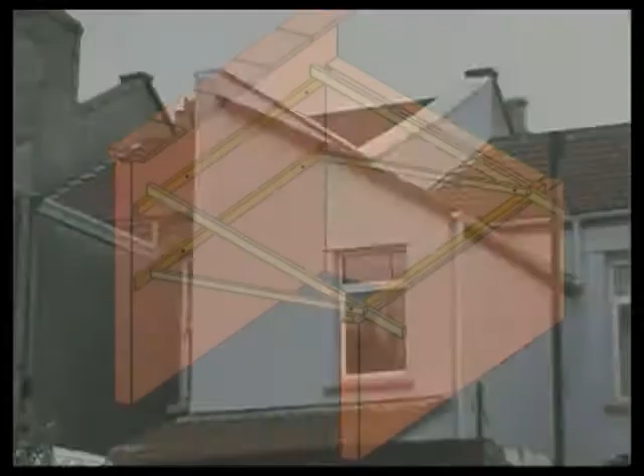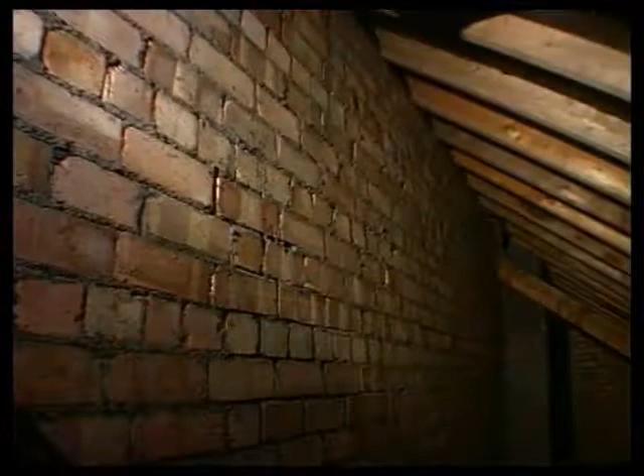It has a limited span and is most likely to be found forming rear extensions. Thousands of these were built at the end of the 19th century. The roof is built with sloping timbers known as rafters. They can be supported on wall plates, and it was usual practice to provide joists to form a ceiling. In some cases, the top of the timbers were built into the wall, but this gave little protection to the rafter ends, and damp penetration could lead to problems of rot.

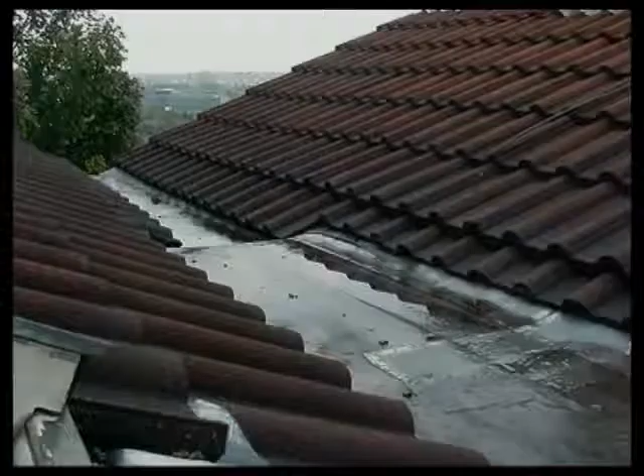Some Victorian houses were built with double lean-to roofs, with a centre valley for drainage. These can cause some maintenance headaches. Simple lean-to roofs are only capable of limited spans, say 3 metres. Greater spans can be achieved by inclining pairs of rafters. This arrangement is known as a couple roof.

The feet of the rafters are normally supported by timber wall plates. At the top, they're nailed to a ridge board, which prevents lateral movement and makes the roof easier to build. The rafters are traditionally fixed at 16-inch or 400mm centres. This is probably the most cost-effective arrangement of the timbers.

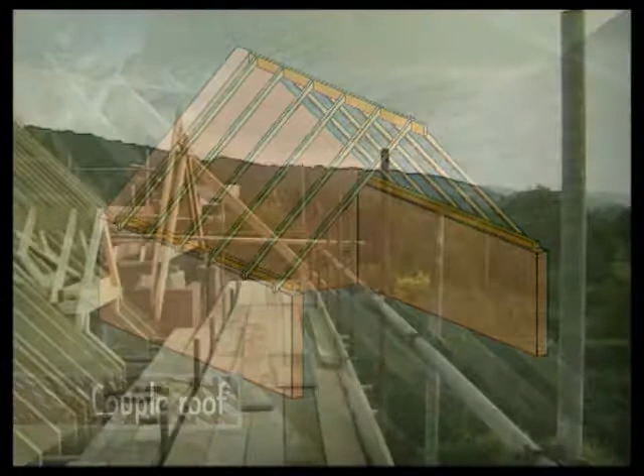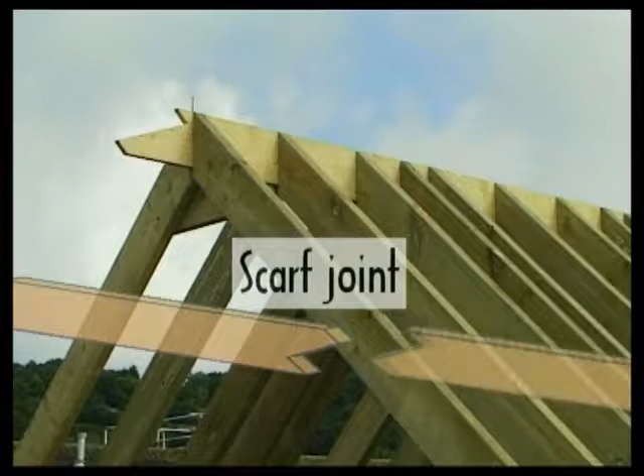Traditional or cut roofs are still built today, but they're expensive compared to their modern counterparts. They can require sophisticated carpentry joints. A scarf joint, for example, is traditionally used to lengthen timbers. The foot of the rafter should be notched over the wall plate and nailed to provide a good fixing. Notching also helps align the top of the rafters.

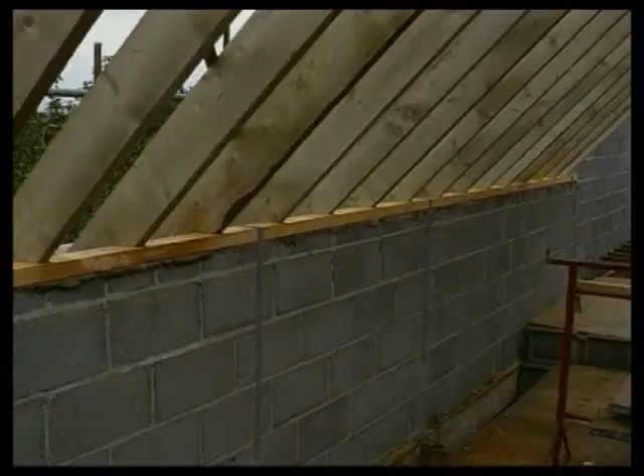The plate is usually bedded in mortar and strapped down to the wall. Strapping is not always required for traditional roofs, but is good practice and doesn't cost much. At the eaves, the exposed feet of the rafters are usually hidden and protected by a fascia board. Any gap below can be finished with a soffit board.

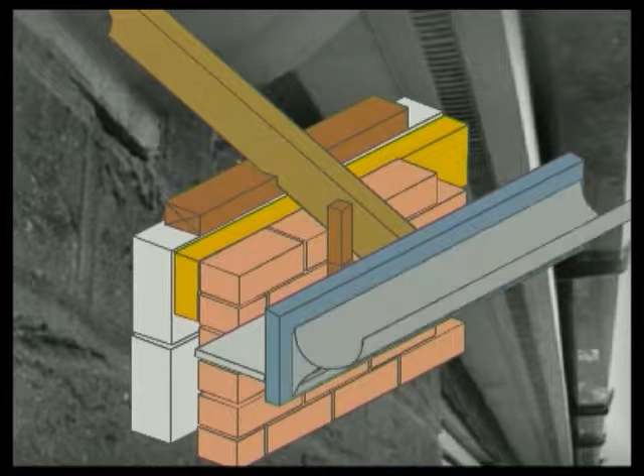The soffit is commonly supported by a simple timber framework, and the fascia, which supports the guttering, is nailed to the rafter ends. Vents for the roof space often form part of the soffit. Overhanging eaves help protect the wall below. The detailing can be attractive, but is expensive. However, in the long term, it helps prevent prolonged saturation, the cause of most brick defects.

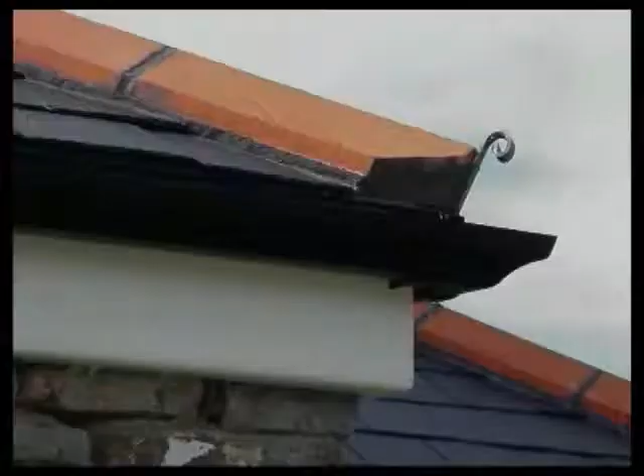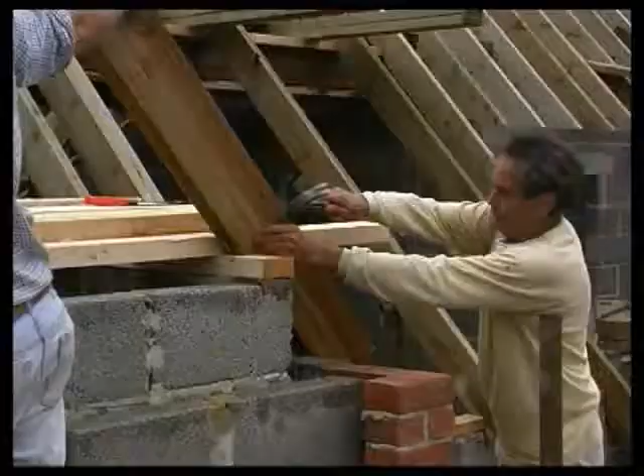Flush eaves, where there's no soffit and the fascia is fixed tight against the wall, are cheaper but provide little weather protection. Traditional cut roofs are very versatile and can be adapted to suit almost any house design. They tend to be used nowadays for one-off prestigious developments, so you rarely see them on new, large housing estates. On this site, safety gear is not being worn, despite being good practice and in most cases a legal requirement.

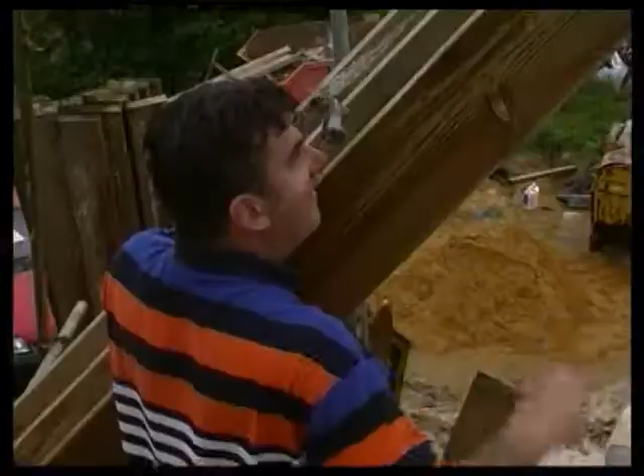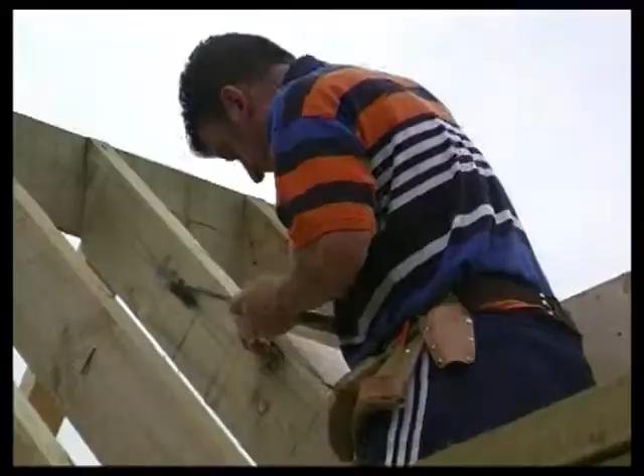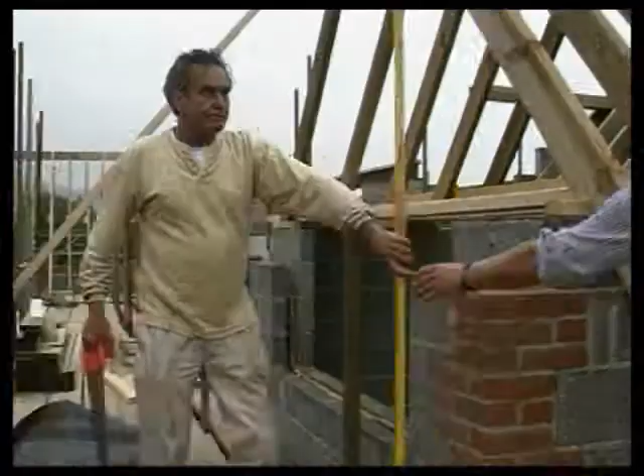Any new roof needs to comply with building regulations. These contain, among other things, approved guidance on the size of roofing components for given spans and loadings. A roof could also comply with the regs in other ways, for example, if it was designed by structural calculations. Most timber is imported from Canada or Scandinavia. Homegrown timber grows too quickly in our warmer climate, producing a lower density material. Timber durability can also be enhanced by chemical treatment against rot and insect attack.

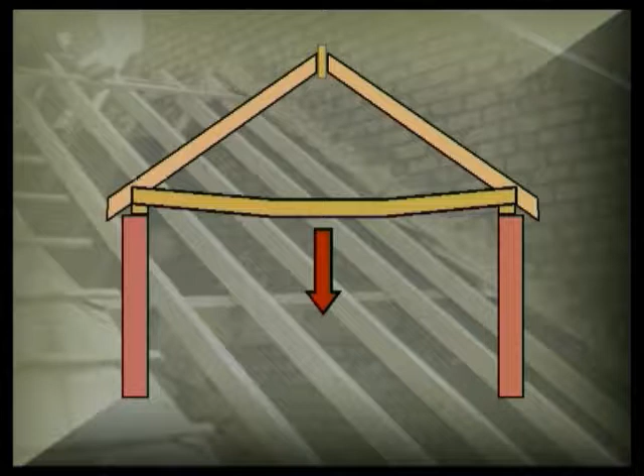A problem with simple couple roofs is that they tend to spread when loaded. A closed couple roof prevents this by tying the rafter feet with a ceiling joist. Closed couple roofs are suitable for small houses with spans of up to about 4 metres. At greater spans, the ceiling joists tend to sag. They can be supported by an internal load-bearing wall or by a combination of binders and hangers suspended from the ridge.

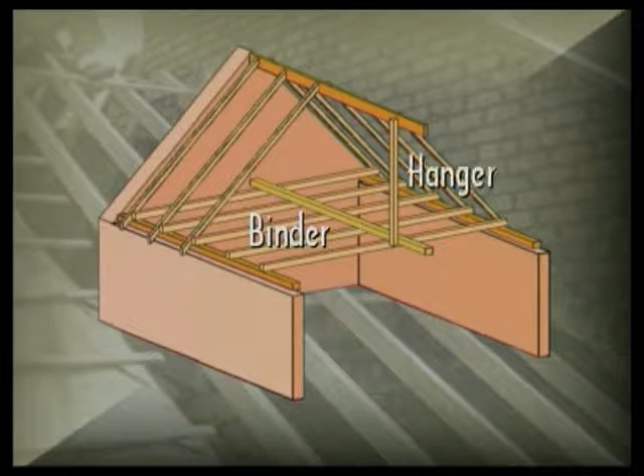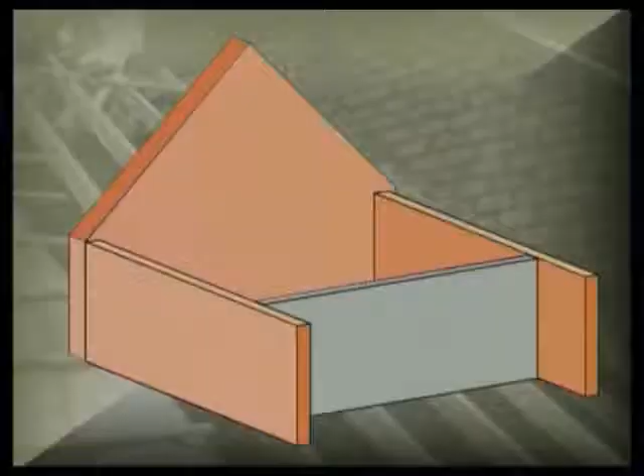Simple closed couple roofs are not suitable for most houses. Even modest Victorian terraces will need roofs that can span well over 4 metres. Large spans require long rafters, and to prevent them deflecting, they would need to be of substantial depth. This is a heavy and expensive solution. A more cost-effective approach is to use purlins. The purlin is normally built into the gable or party walls and supports the rafters mid-span. There's usually one on each side of the roof.

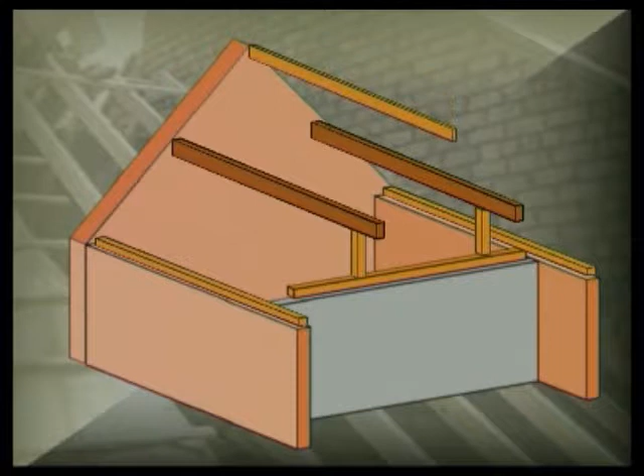Where houses are fairly narrow, purlins can span from wall to wall. In wider houses, deeper purlins or some form of intermediate support will be required. One common method is to use diagonally opposed struts supported on an internal load-bearing wall. Although effective, these struts clutter up the roof space. Another option is to strut vertically. This requires a suitably positioned internal load-bearing wall. To distribute the load along the wall, it's good practice to provide a wall plate.

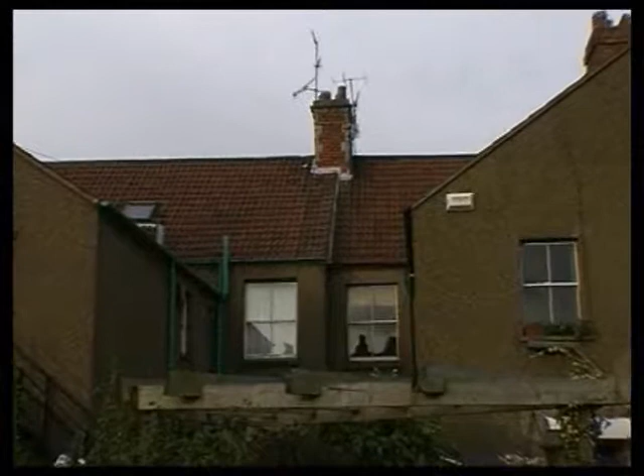The vast majority of houses built before the 1950s will have some form of purlin roof. Many will also have purlin strutting. In summary, let's look at a well-built traditional cut roof from the early 1900s. The rafters are supported mid-span by substantial purlins spanning about 6 metres between party walls.

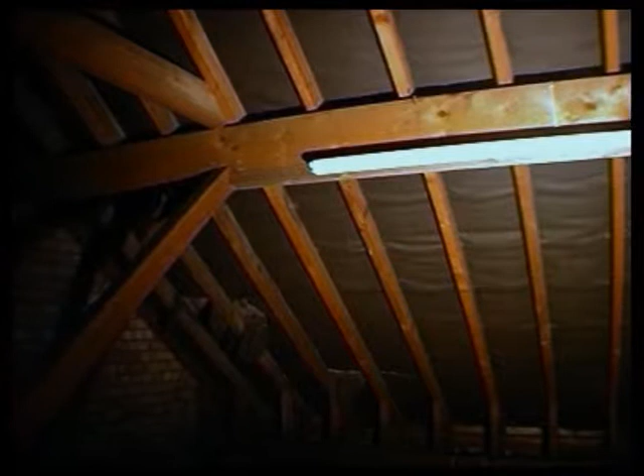The purlin ends are supported on a brick corbel and partly built into the wall. Two pairs of diagonal struts support the purlin. These bear onto an internal load-bearing wall. A neat bird's mouth joint ensures a strong and stable connection between the strut and purlin.

Additional struts run from the purlin to the party wall. Two large section horizontal ties provide rigidity in high winds. At the top of the roof there is a ridgeboard supported on corbels.

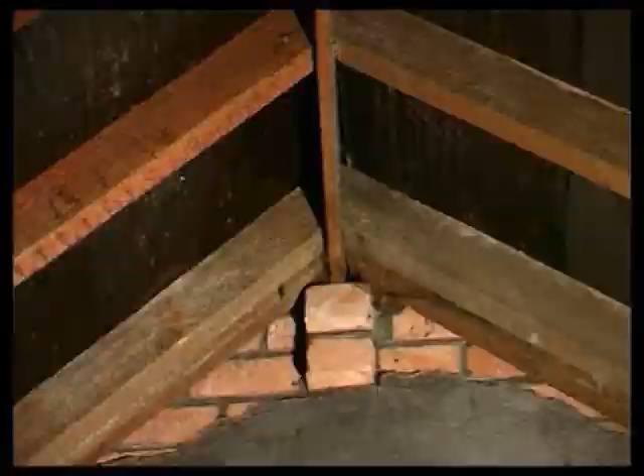Purlin roofs are still built today, but are not very common. On this site, the roof space is being used for accommodation, and the designer has incorporated steel purlins. A wall plate screwed to the top of the purlin provides a fixing for the notched rafter. Steel's high strength allows long spans and precludes the need for purlin strutting.

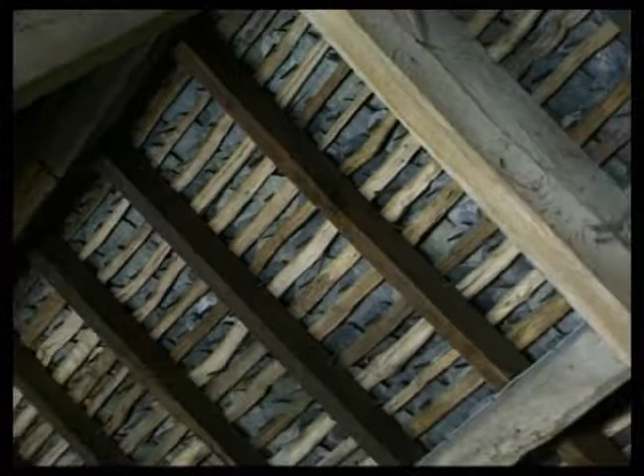In big old houses, internal walls were usually too far apart to provide intermediate support for the purlins. In other buildings, there were no internal walls at all. In these situations, trusses provided purlin support.

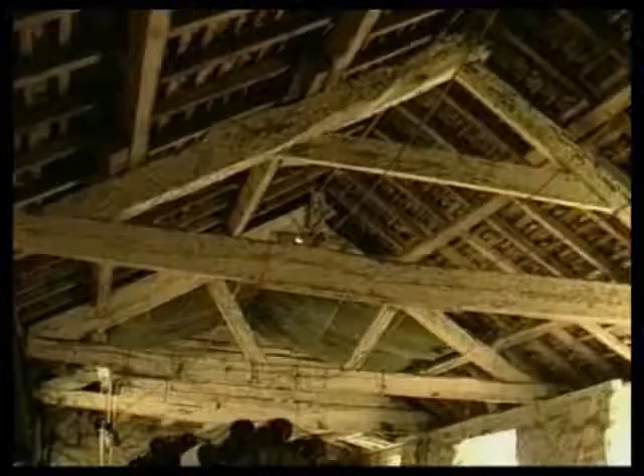Trusses can be found in a range of shapes and sizes. Their primary function is to support the purlin, but they also help tie the external walls where there are no ceiling joists. They were made from big, heavy timbers, often with bolted and strapped connections. One of the best places to see traditional roof trusses is in Britain's parish churches.

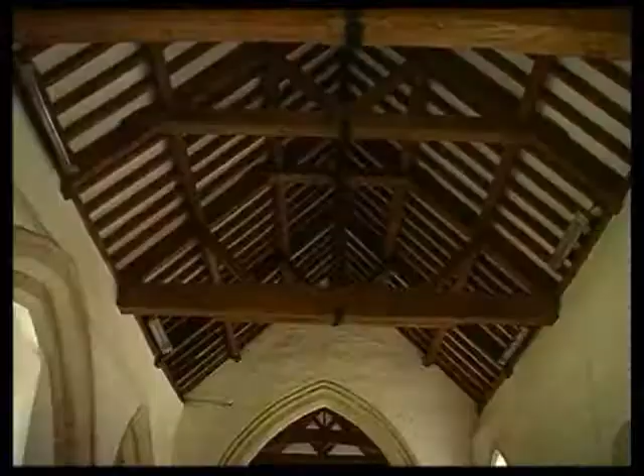At various times in Georgian and Victorian Britain, houses were built with parapet walls. Sometimes this was to emphasise the facade and reduce the visual impact of the roof. The construction is not as complicated as it looks. Typically, the rafters are birds-mouthed onto a wall plate. The ceiling ties provide support for the gutter, which was traditionally lined with lead. For durability and appearance, the parapet is finished with a coping.

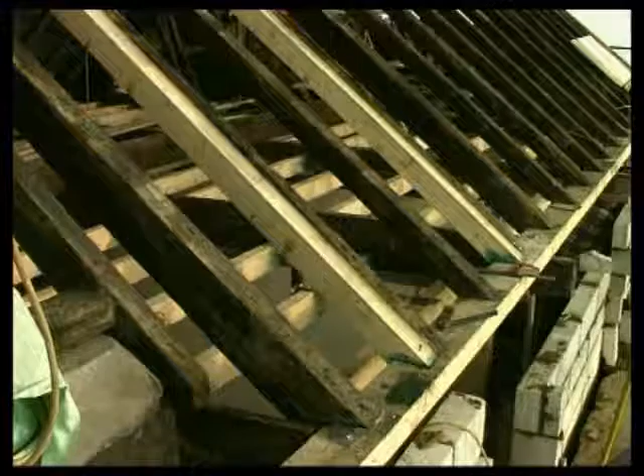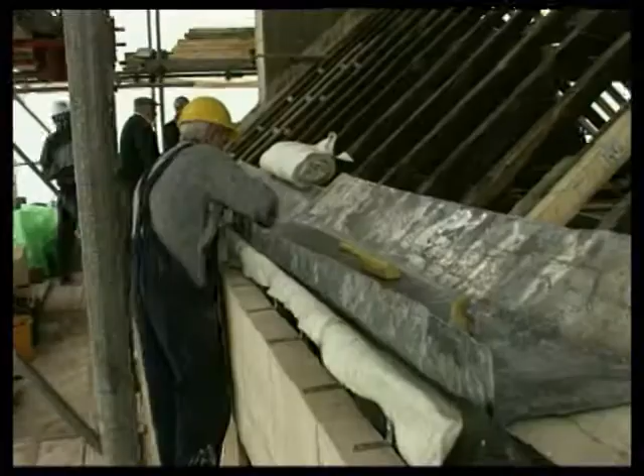This Georgian roof is being renewed using traditional techniques. Softwood boarding is being laid to take the lead gutter. Lead working is a very skilled and arduous job, but done properly, lead can easily last 150 years.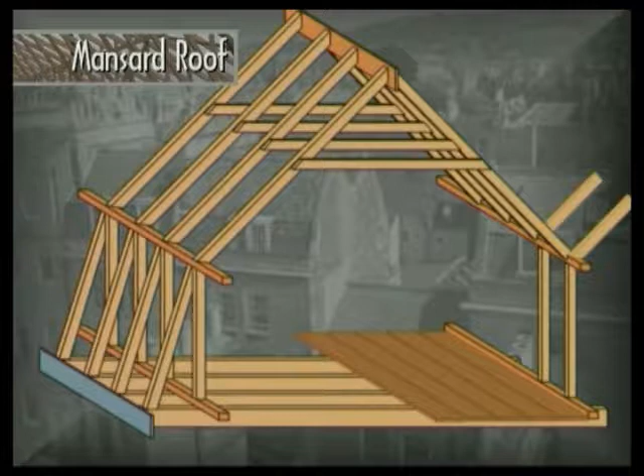Mansard roofs are easy to spot because each roof face has two slopes. Two mansards side by side keep the overall height of the roof to a minimum. Their purpose is usually to provide accommodation within the roof space. They were very popular in the 18th and early 19th centuries, and there are some examples from the 20th century.

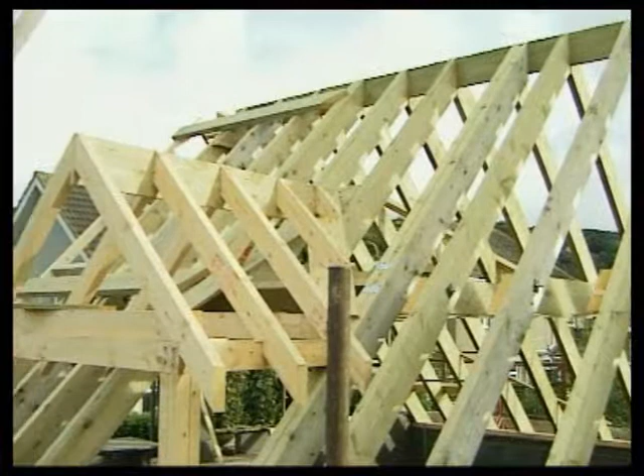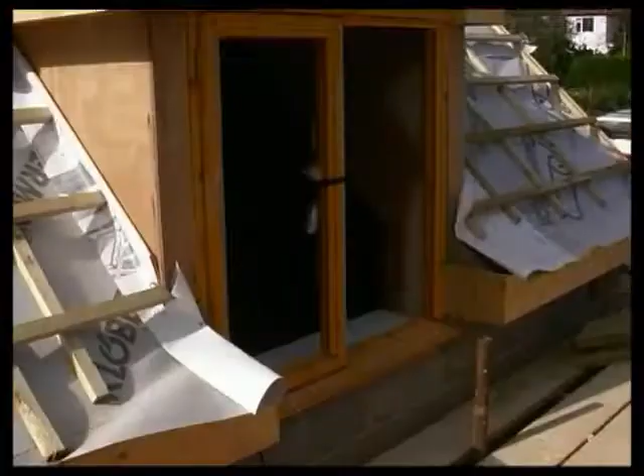Collar roofs were sometimes used to create an upper floor at minimum cost. It's similar in construction to a closed couple roof, but the tie or collar is part way up the slope. The higher the tie, the less effective it is at providing restraint. A good joint between the tie and the rafter is therefore essential. A dormer set just below the collar provides additional space, allows for vertical window openings, and can also be an architectural feature.

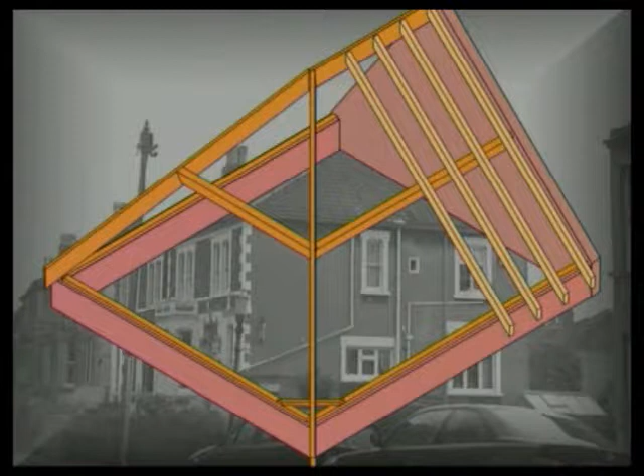Some roofs are hipped. The hip precludes the need for gable brickwork, but its construction is quite complex. The hipped end is constructed from a pair of hipped rafters which run to the corners of the wall. The cut rafters which run into the hip are known as jack rafters. The need for purlins and struts depends on the size of the roof.

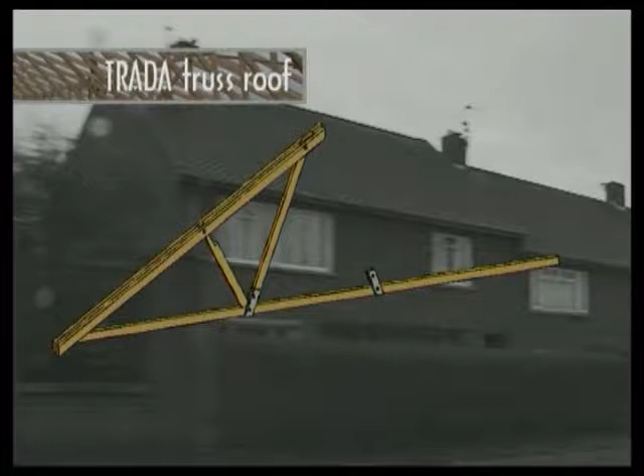In the aftermath of World War II, traditional building materials were in short supply, and government restrictions limited the amount of timber which could be used in housing. The TRADA truss is a lightweight prefabricated version of the traditional truss. It was designed to reduce the amount of timber in the roof while still allowing big spans.

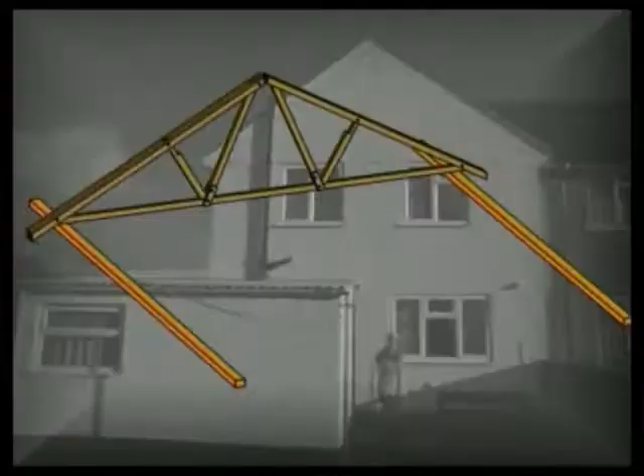The trusses support the purlins and were typically fixed at 1.8 metre centres, with common rafters and ceiling joists in between. No internal load-bearing walls were required. The popularity of TRADA trusses was relatively short-lived. Their success led to more prefabrication of roofing components and the eventual development in the 1960s of trussed rafters.

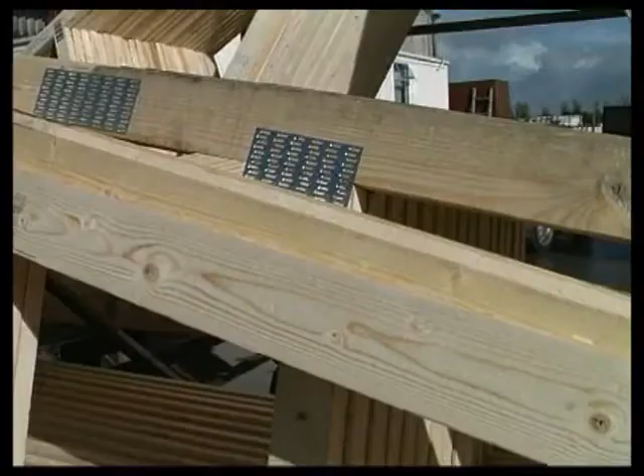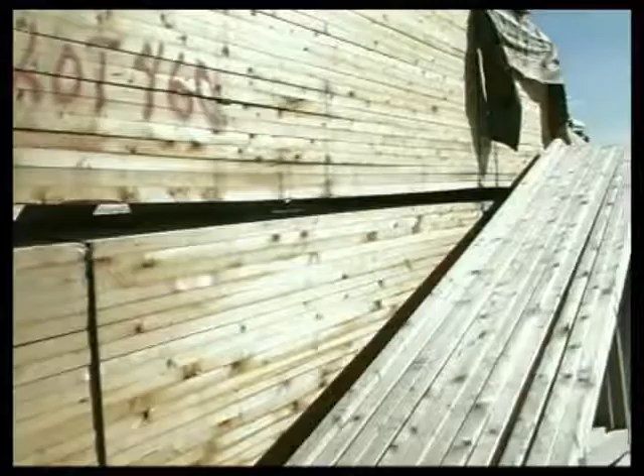Trussed rafters provide a lightweight and fast form of roof construction. They come in many shapes and sizes to suit almost any building. The design of a trussed rafter depends on a number of factors: span, shape and pitch of the roof, the position of load-bearing walls, the height, location and exposure of the building, the type and weight of roof coverings, and the overhang at the eaves.

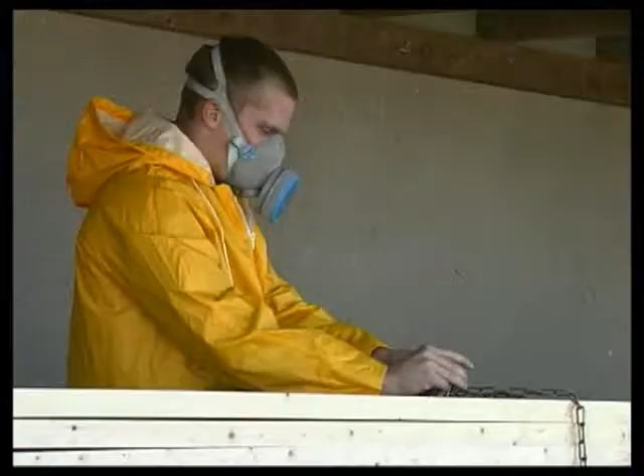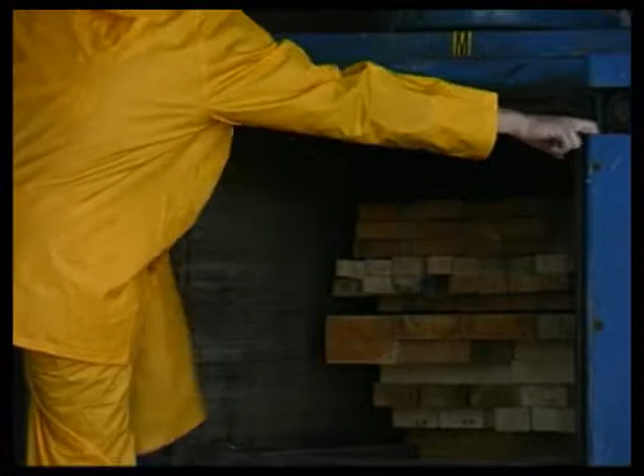In practice, most trussed rafters are chemically treated to protect against rot and insect attack. In most parts of the country, this is not a building regulation requirement. However, in the southeast, the regs insist on treatment to prevent damage from house longhorn beetle.

The first stage in truss manufacture is to translate the elevations and plans into a computer-generated model. From this, truss type, size and layout can be calculated and realised in 3 dimensions. Once the design is complete, cutting lists and production details for manufacture can be generated, as well as construction drawings for use on site.

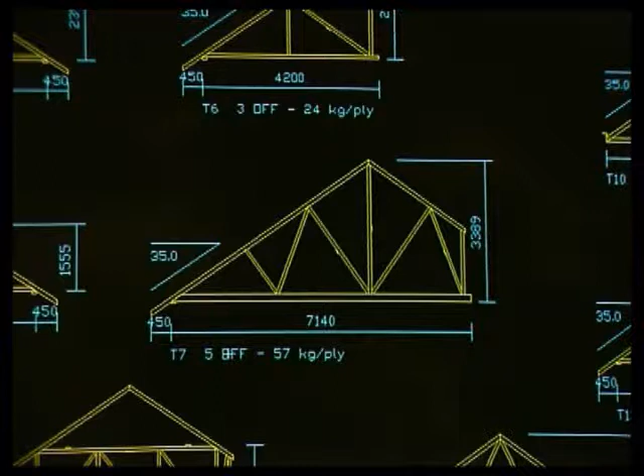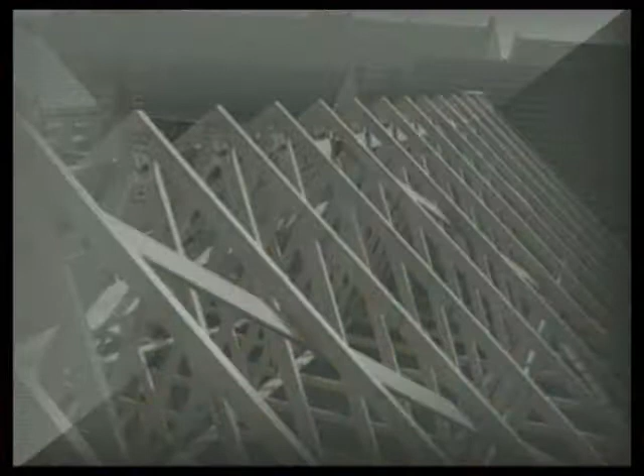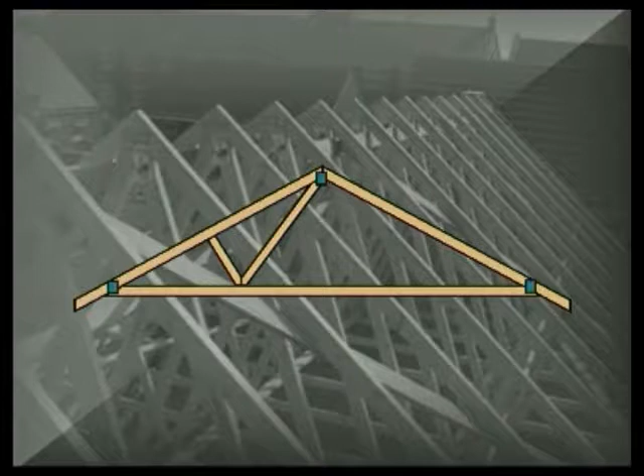Although a trussed rafter roof looks complex, the principles are relatively straightforward. The rafters and ceiling joists are not dissimilar to a traditional roof. Both will sag under loading and self-weight. By adding internal compression and tension members, the truss becomes rigid and deflection is minimised.

Good jointing between members is essential if the truss is to maintain its structural integrity. Nowadays, the most cost-effective method is to use nail plates. A number of companies produce trussed rafters using varying degrees of automation.

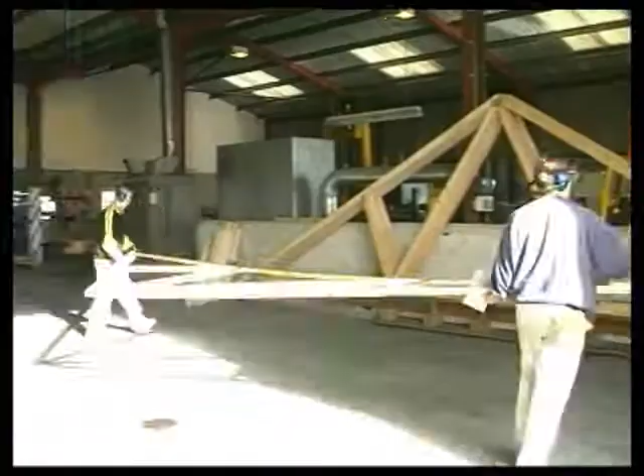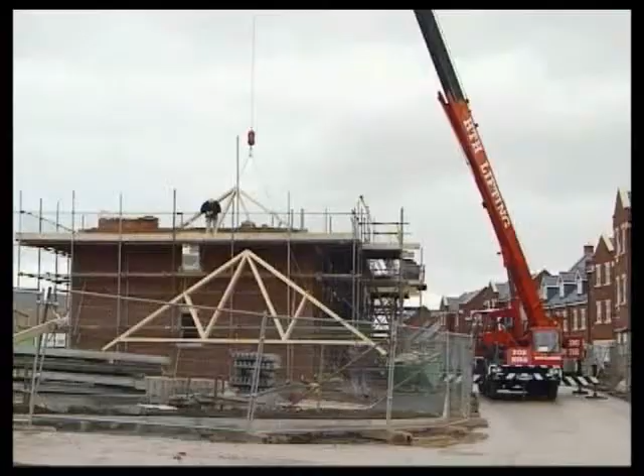Trussed rafters, despite their light weight, can produce a very strong roof structure, but they can easily be damaged, so good site practice is essential. For example, they should always be lifted onto the roof in their upright position to minimise stress on the plates. Bending the truss over the handrail can pull the nail plates out of the timber.

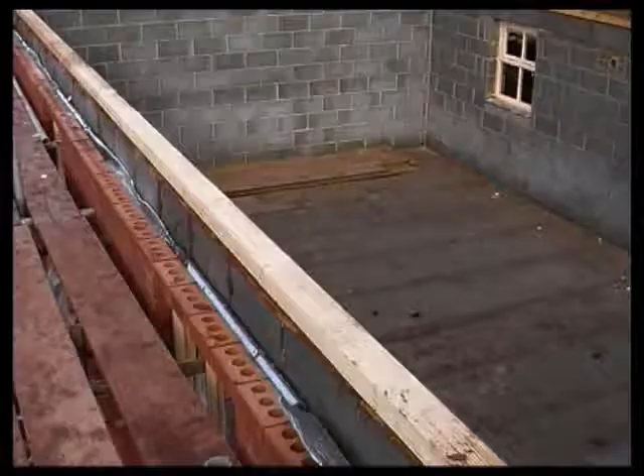One of the big advantages of trussed rafters is their ability to cover wide spans without the need for internal load-bearing walls. However, the finished roof will deflect slightly, so to avoid damage, partition walls must be built after the roof has been tiled. It's common practice to fix the trussed rafters before the gable ends are complete. This provides a template for the bricklayers.

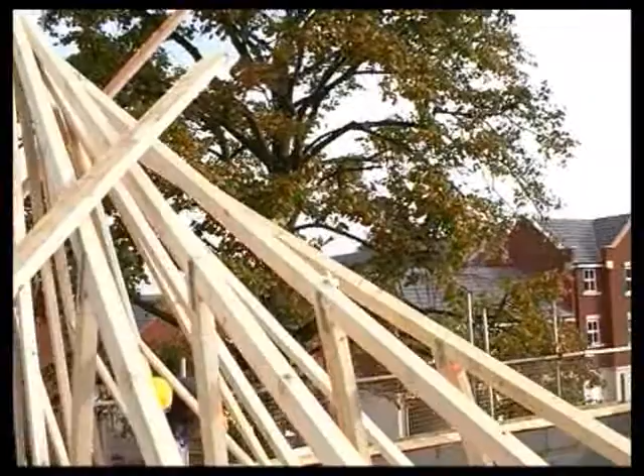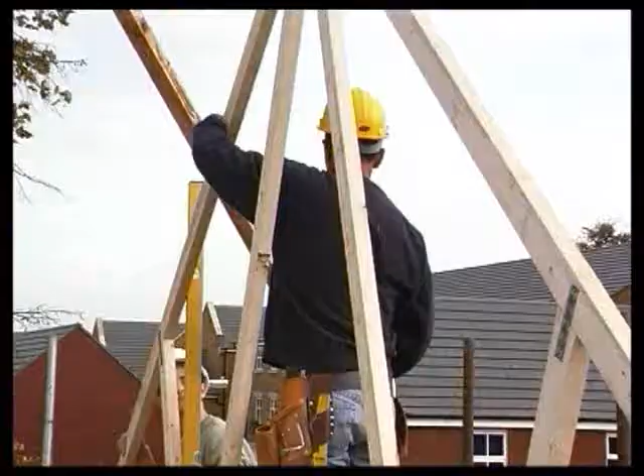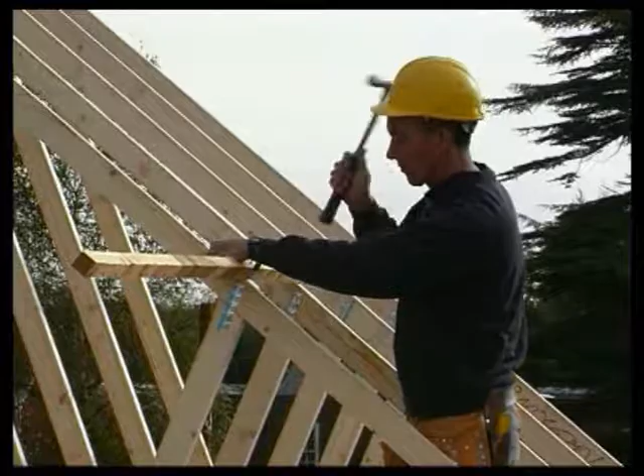The first truss is fixed to the wall plate, plumbed and temporarily braced back to the scaffold to keep it upright. Once in position, the remaining trusses can be erected. On this site, the trusses are fixed in position by skew nailing through the nail plate, but this can cause damage. It's better practice to use special truss clips. Temporary bracing keeps the trusses upright and gives some stability to the unfinished structure.

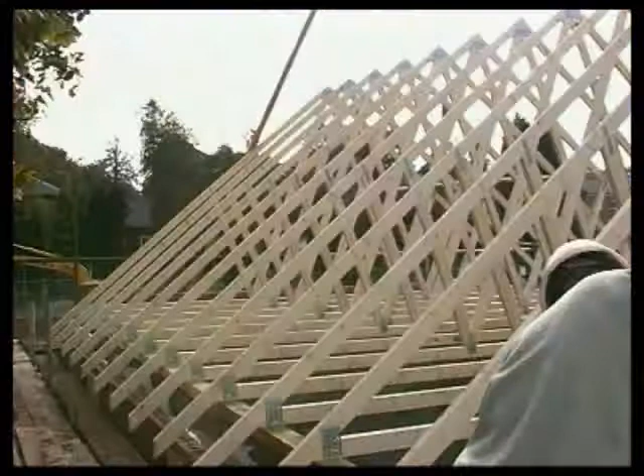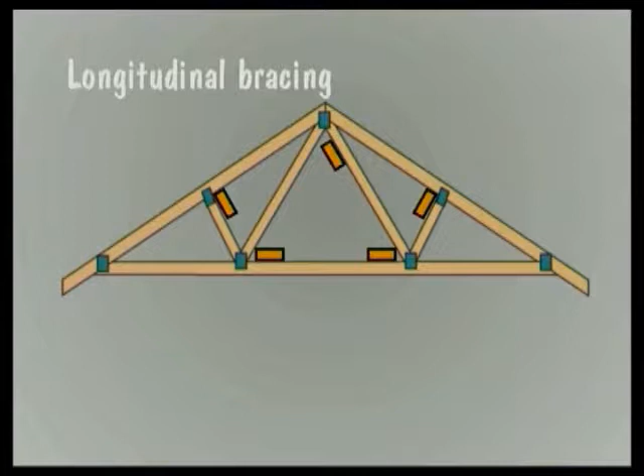When all the trusses are in position, a series of braces have to be added to make the structure rigid and to resist loading. Longitudinal braces should be fixed at each inner node point. They hold the trussed rafters in the correct position and at the correct centres. Linking the trusses together forms a single structural unit. Braces should be formed typically in 25 by 100 mm softwood. Each brace should be positioned to butt joint the gable wall and should be nailed twice to every truss.

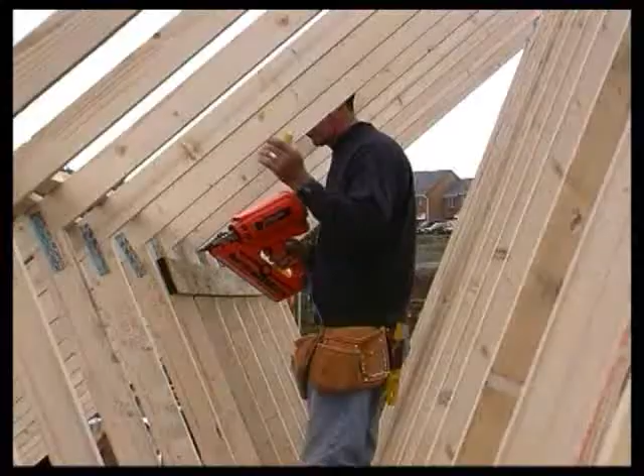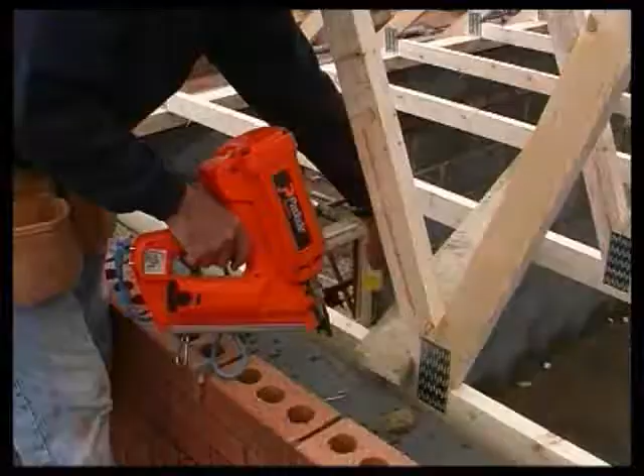Plasterboard, when correctly fixed to the ceiling, helps brace trussed rafters. Where omitted, say in a garage, or where the wind loads are high, diagonal bracing at ceiling level may be required. Diagonal bracing at rafter level is always required. It should be nailed to the wall plate and to the underside of every rafter. It's this brace which prevents racking and keeps the trusses vertical. The layout of the diagonal bracing depends on roof shape and size. There are a number of possible configurations.

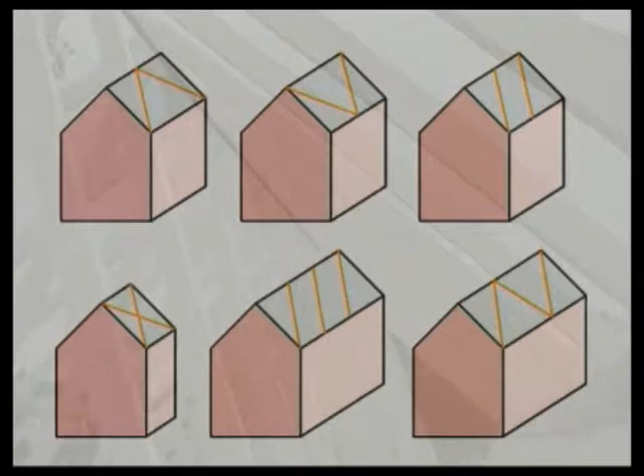On this site, the gable ends were built after the roof structure. The gable end, although masonry, is actually quite vulnerable to wind loading and must therefore be strapped back to the roof structure. The number of straps and their position depends on the width and height of the gable. On steep roofs, straps are also required at ceiling level. Strapping down the wall plate prevents the roof lifting in very high winds. These straps are at 2-metre centres and should be at least 1 metre long.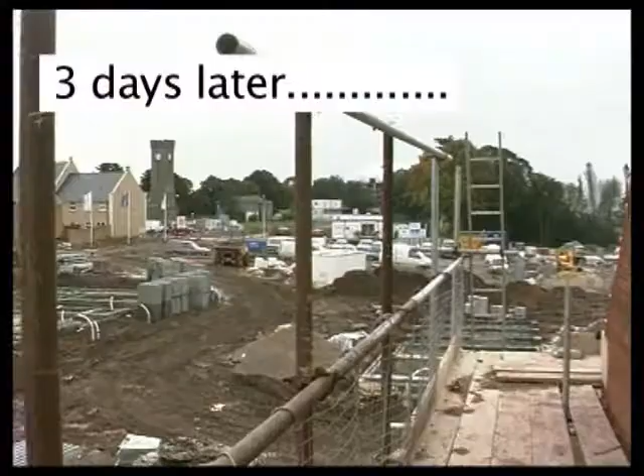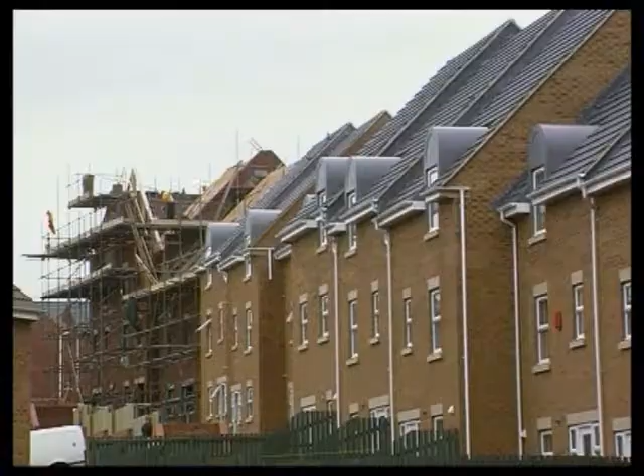A big disadvantage with standard trussed rafters is the lack of usable space within the roof void. Attic trusses are designed to free up the roof space for accommodation. To provide adequate living space, the use of internal members is restricted, so deep-sectioned, heavy timbers are required. To achieve sufficient ceiling height, these trusses have to be big, so big in fact that they are often delivered in sections and bolted together on site.

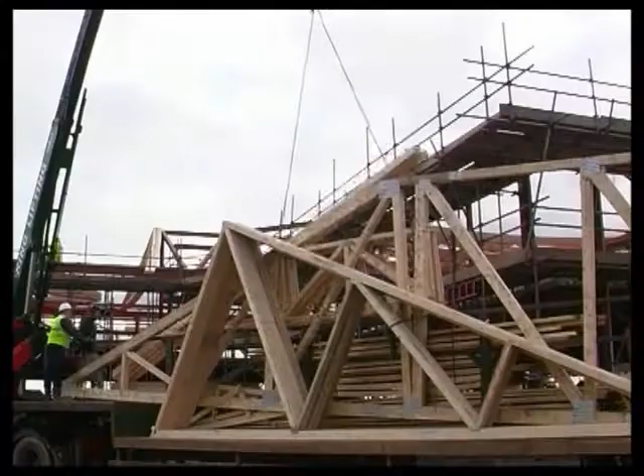Trussed rafters are also ideal for large span buildings. 50 years or so ago, timber roof structures would have been prohibitively expensive for buildings of this size. It would have been much more common to find corrugated asbestos sheeting fixed to steel purlins and trusses.

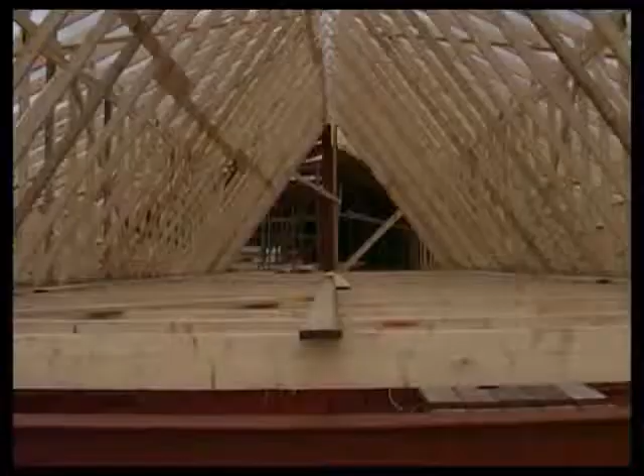Modern timber trussed rafters are specifically designed for each job to produce a cost-effective, light but strong structure. Factory prefabrication improves quality control and reduces the amount of work on site. They're relatively fast to construct, and they don't require the sophisticated carpentry joints of complex traditional roofs.